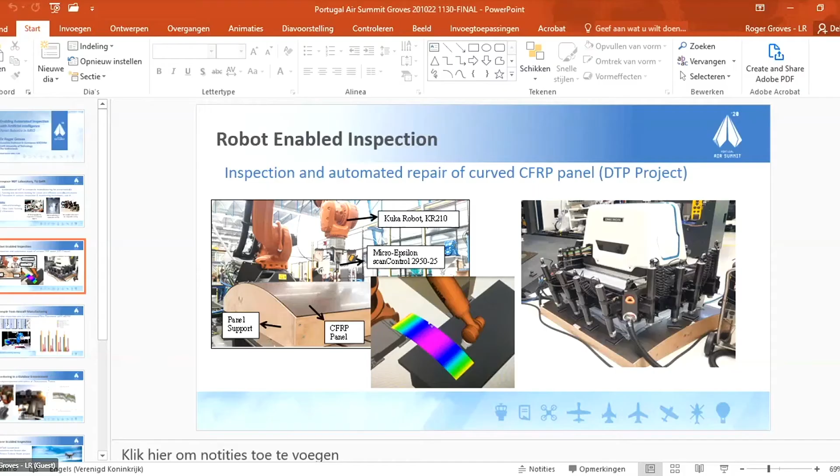Dr. Groves, are you listening to me? Yes. We don't see anything on the screen. Oh, we have two persons, strangers, but not exactly the things we were supposed to see. So you need to check what's going on. We'll wait, we have time. Don't worry, this isn't a flight issue. Yes, I'm back now, let me just try again. Yes please, I can share my screen. Can you see it now? Not yet. So it's beginning with the presentation. Take your time, yes, we still have half an hour. Good, yeah, good. Yeah, can you go back to the first slide please, so that we can make it coherent with your speech? Is that possible? Yes, okay yes. Thank you, sorry for interrupting you. Are the slides visible now? Yes, perfect, okay, thank you. And still now? Yes, you are not seeing, okay, but what is relevant is the presentation. Okay, thank you, perfect. So yeah, I gave my introduction.

I wanted to just quickly show you these three examples of research topic areas in my laboratory: 3D shearography, which is the left-hand picture; fibre Bragg grating monitoring of a composite hydrogen tank during testing in the middle picture; and an example of air-coupled ultrasound in the right-hand picture.

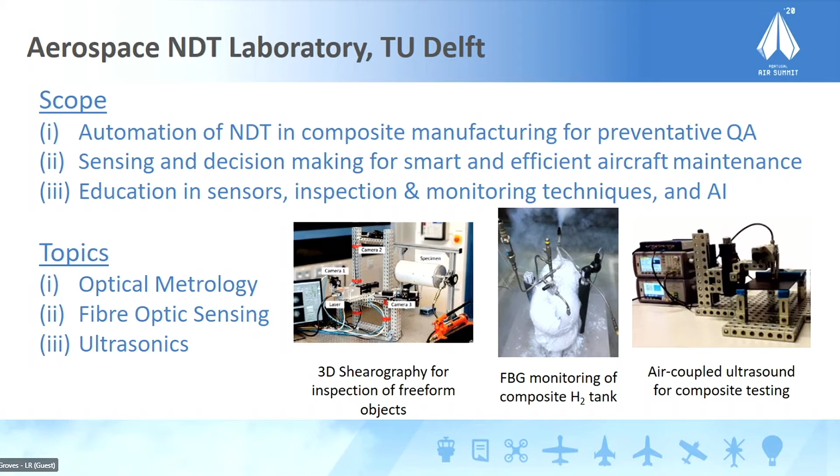Let me go on to where we're using robots for robot-enabled inspection. These are examples from the Defence Technology Project. We can see here in this picture the test panel. We're scanning the test panel with a laser line scan sensor. We're analyzing that data to determine the curvature, the extent of damage due to impact on the panel.

On the right-hand side, we have a 5-axis milling machine, a portable one, which has been placed on the panel and used to mill out the repair patch area. In this project we then added a repair patch, bonded into the structure, and then repeated the non-destructive inspection analysis to confirm the repair had been made satisfactorily. So this is a technique to speed up and automate the repair of composite aircraft.

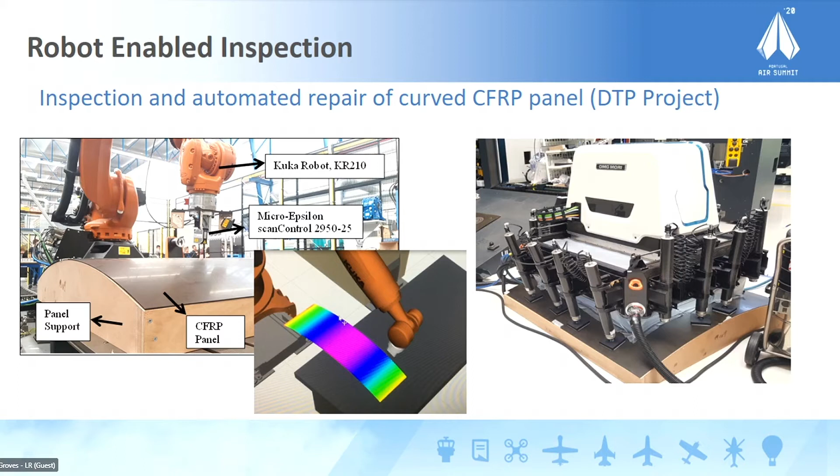The next slide takes a little direction away from maintenance and gives you one example from aircraft manufacturing. In the automated fibre placement process, there are a number of different defects that can be introduced. The picture top left shows examples: wrinkle, twist, gaps, overlap, and foreign material that can be found. Of course, we like to find them early in manufacturing so that they don't become a problem during in-service use. In this project, we also worked with a laser line scan sensor fitted to a robot, in collaboration with DLR in Germany.

As mentioned briefly earlier this morning, one of the very important things with using artificial intelligence to inspect parts in service is to look very carefully at the false positive rate and the false negative rate, and to work very hard on the reliability of the algorithms to give a correct diagnosis of the part being investigated.

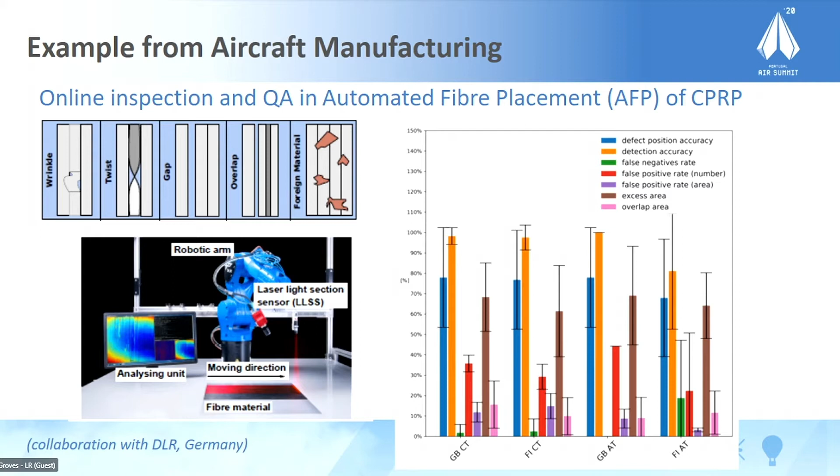Okay, I'd like to show one nice example here. This is inspection of tires during tire qualification tests performed with Airbus. We use the Teratyre inspection truck, where you can fit one aircraft tire in the center and apply a force to the ground with different rotation of the tire to check the wear.

The left-hand side shows an early picture from the project where I had the idea to place a bicycle wheel onto the robot we have in the laboratory at TU Delft. In the center lower picture, you can see the sensor we placed close to the tire. It's actually a hostile environment there, with pieces of rubber and smoke, a difficult environment.

In this test, we were able to see that the tire degradation was of the order of 10 millimeters, and we saw some variations in the tire degradation depending on the loading that was applied to the tire.

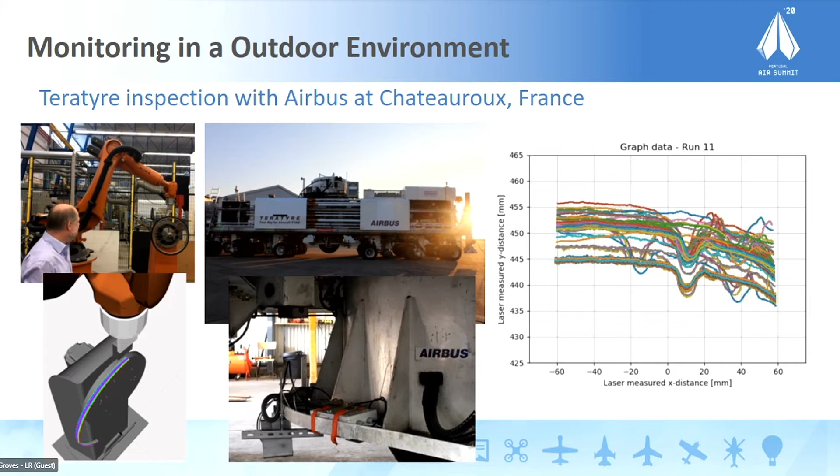Okay, now briefly introducing a new project we're starting in the Aerospace NDT laboratory. This is drone-enabled inspection. The project is called AirTub: automated inspection and repair of an offshore wind turbine blade. The wind park is Borssele 1 and 2, in the North Sea off the coast of the Netherlands.

In this project I don't have any results to show yet, but we're developing miniaturized inspection technology to be carried by the drone to perform automated NDT inspection offshore. And of course, what we learn in this project will not only help improve the sustainability of the energy supply, but will also find its way back to the aerospace environment for aircraft inspection.

My last technical slide is one of the competing techniques for robot inspection, also mentioned earlier this morning, which is structural health monitoring. In my work on structural health monitoring, one main aspect I look at is the design of these systems for real structures, and the positioning of sensors to cope with different types of damage: deterministic damage, which occurs where there's a high stress concentration in the material, and probabilistic damage, which occurs due to random impact damage.

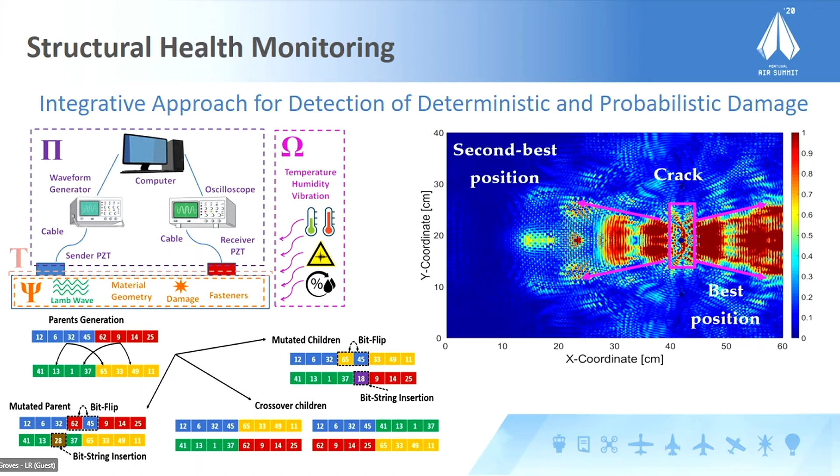The picture on the right shows the positioning for the best and second best structural health monitoring sensor locations. Okay, so with that, I'd like to thank you for your attention and pass it back to the chair of the session.

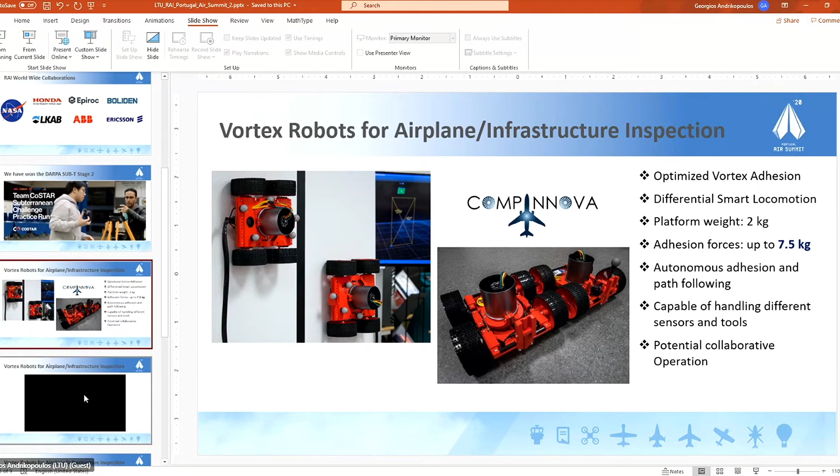Which is constructed by University of Patras. So today we're going to give you a short presentation of the activities we have been doing on the Vortex robot platforms, and a couple of videos to show you. I don't know whether you can see the videos, because I understand you don't see the presenter's view. Just a verification, can you see the video?

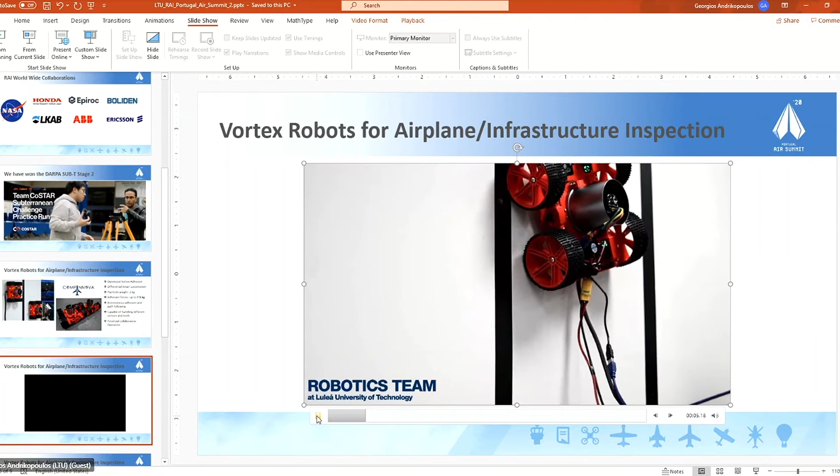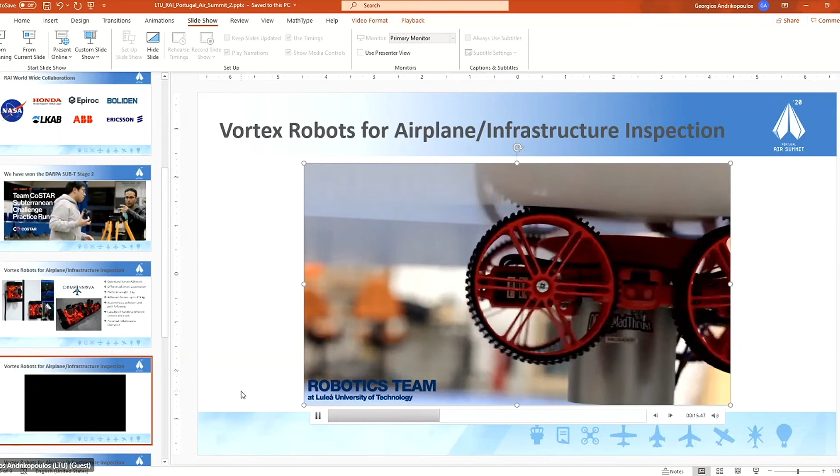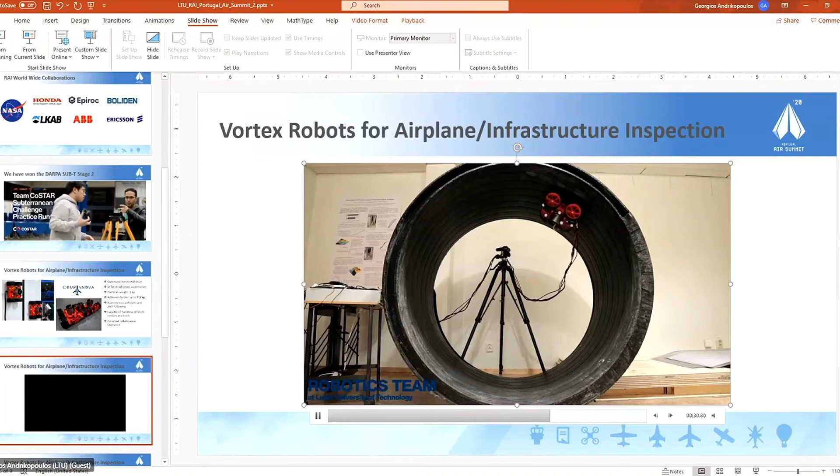So the climbing robot platform uses the principle that when we put an electric ducted fan close to a surface, there is a sweet spot, an optimized distance where we get the vortex phenomenon and the maximization of the adhesion force. We are using this principle to produce a platform that can hold a high payload, in this case 7.5 kilos, which gives us also the ability to mount sensors and different tools.

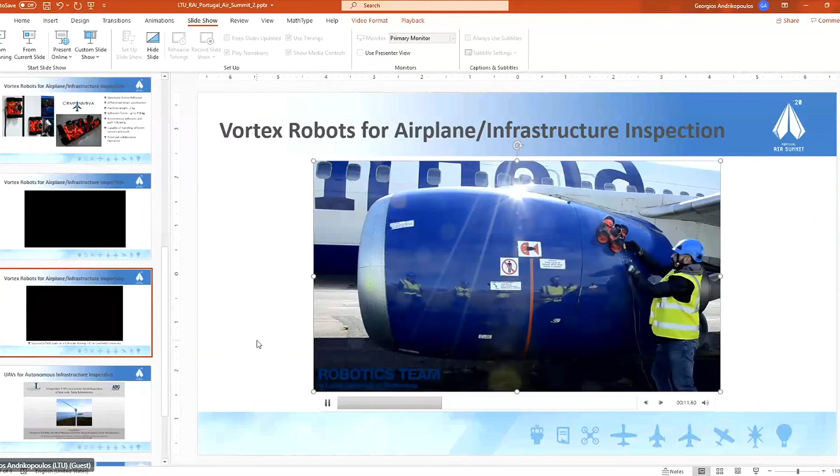We have been testing and evaluating the specific platform in different scenarios, not only onto aircrafts, as you see in the video, which was one of the successful trials at Cranfield University on a Boeing 737, where we tested the mechanical properties of the robot and its ability to traverse different surfaces of an aircraft, from a fuselage to wing, and also the challenging transitions between the wing and the fuselage. So from that part, we're talking about the structural challenges of using such systems, and of course, as you mentioned, the challenges of using automated systems in close collaboration with human operators.

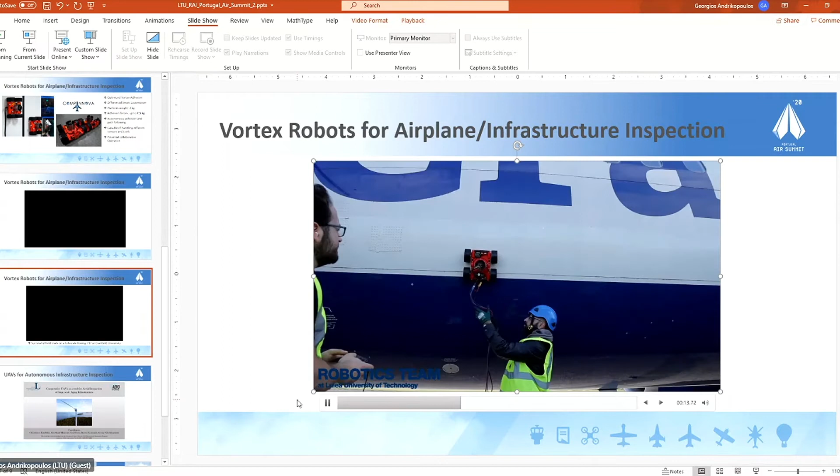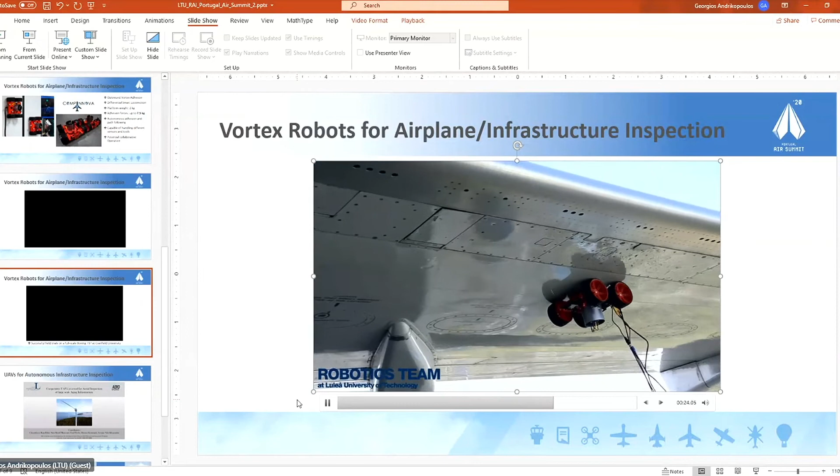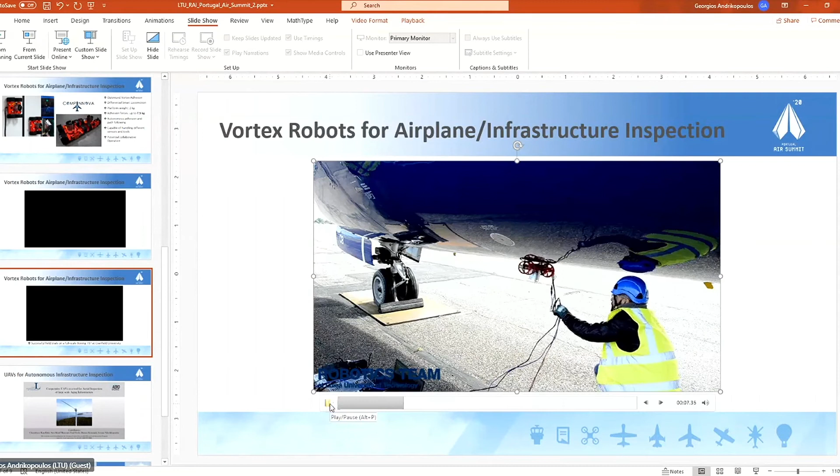Currently, in respect to CompInnova, we're performing the final integration tests with the sensors and the final tests on real composite panels, assessing the general efficiency of the solution in handling autonomously - and we highlight that, autonomously - the inspection, but also semi-autonomously the repair via a laser cutting process and a patch placement process performed by an automated system. We have also been developing different technologies, software integrations and autonomous behavior for wind turbines and mines, as I mentioned.

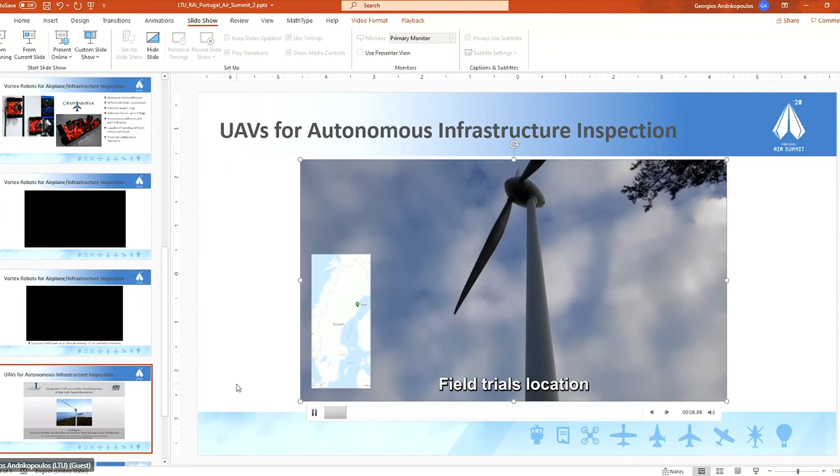This is a video of field trials that we did in north of Sweden in a wind park. In this case, we used drones and optical representation, optical cameras, in order to visually inspect the wind turbine. The visual inspection was done autonomously.

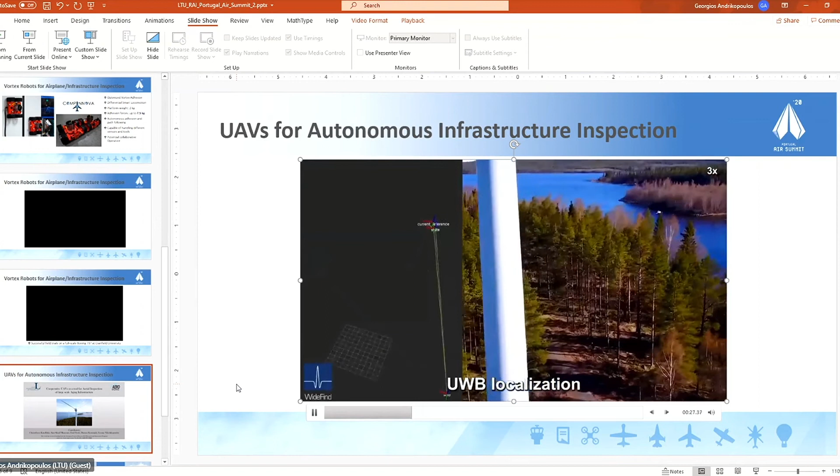We have performed collaborative path trajectory generation in order to use multiple drones for that particular purpose. And the end goal was to recreate a visual representation, a 3D reconstruction of the wind turbine in order to assess visually any damages on the surface.

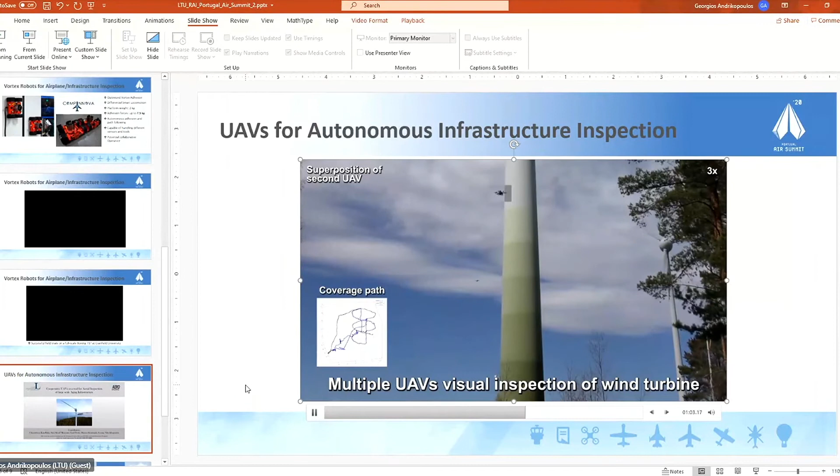Of course, there are a lot of challenges here, the absence of features, as we are talking about a quite uniform structure. This is something we are currently developing and testing, not only with the drones, but with our climbing robots.

So we are developing algorithms and software to account for autonomous inspection, for disturbances like high winds in this case, but also to account for human-robot collaboration, such as in the case of airplanes, where we want the robots to work collaboratively with themselves and with human operators.

So this would be a brief presentation of our efforts and activities funded by Horizon 2020 projects, and also our worldwide collaboration with the aforementioned companies. That would be the end of the presentation. Apologies, there was a mix-up with the multiple screens, so I guess you were seeing the PowerPoint this whole time, but I hope you got the first idea of our activities in the field.

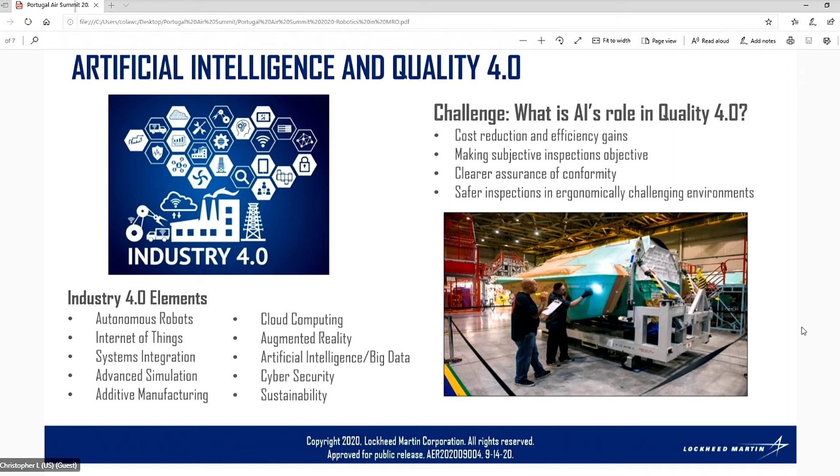Unfortunately, that is what historically we still see today. Historically, it's been the best method, but I think there's a better future possible with the newer techniques made possible by Industry 4.0. I think artificial intelligence is one of those critical roles, as we've been talking about the past 2 days at the Air Summit.

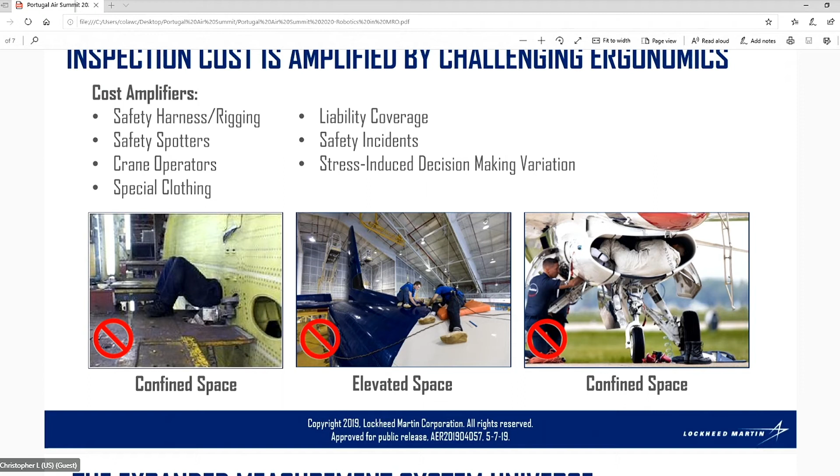So specifically for the MRO arena, the problem associated with doing human-based inspection has to do with, one, safety, and two, hidden cost.

Anytime we perform an inspection in a confined space, whether that be inside of a fuel tank, which of course has odors and has to be vented first, there's a large cost in terms of prepping that bay for a human to enter. You would have to think there's got to be a better way to do this, as well as for climbing on top of a large aircraft and doing an elevated space inspection.

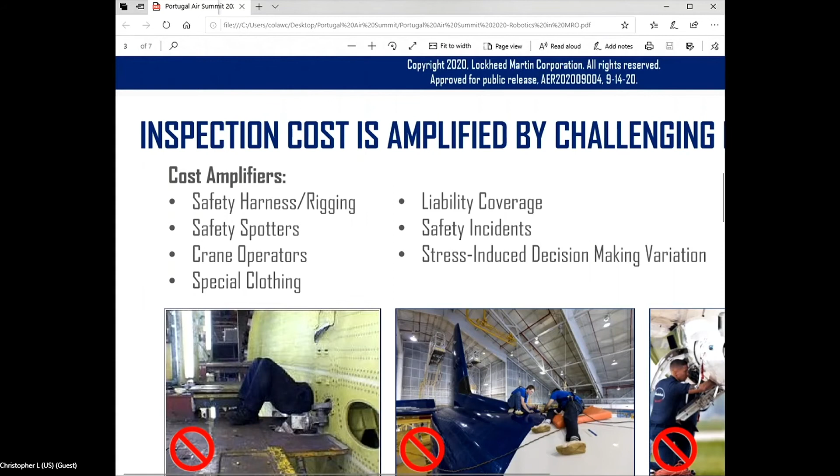It's interesting, in our research we've uncovered that the time it takes to do the inspection is one thing, but the total time involved with setting that inspection up with the safety spotters, the personal protective equipment, and procedure can actually raise the cost of these inspections by 4 to 6 times the man-hours associated with just doing the inspection if you were standing on your own two feet.

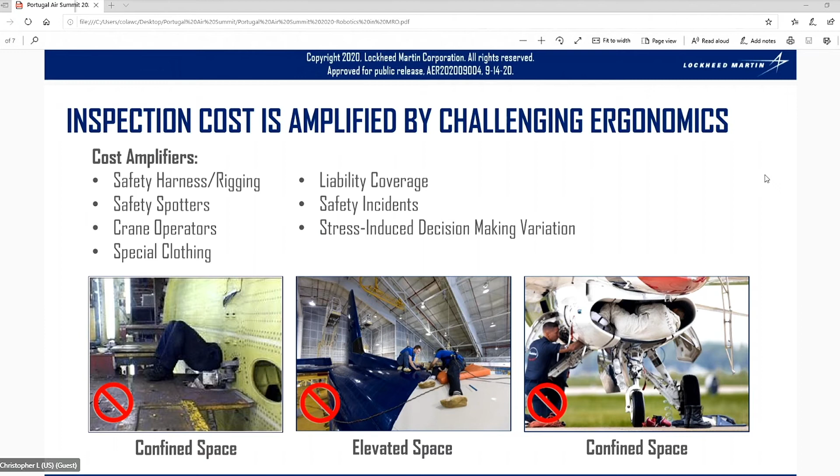So that makes a huge use case for investing in these technologies for the betterment of our process. Now, most of us who have classically been in this environment are very used to gauges, and to training our operators to minimize that measurement variation.

What we're going to see is that we need to be more focused on AI, and that of course induces some new areas of concern. One of them is, how do you validate and qualify those AIs? This introduces a data science body of knowledge that's a new emerging topic for everyone in the arena.

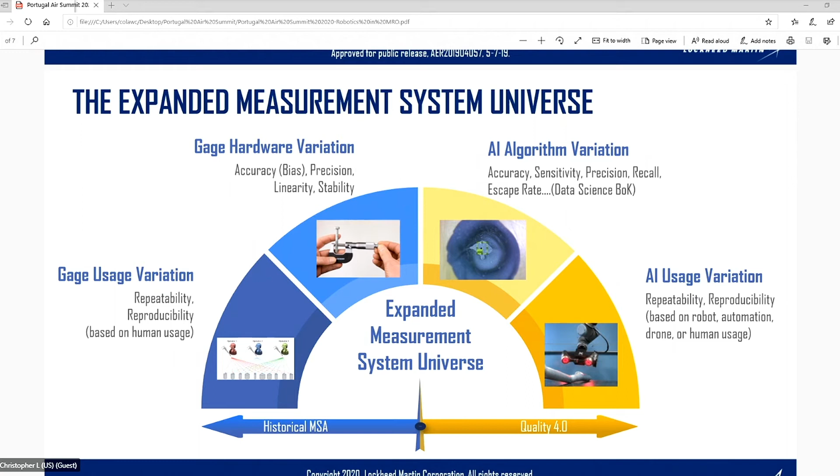Also, how do we qualify that the AI is performing the work correctly? Much like how you would qualify a gauge, there has to be a process in the future of qualifying the AI as well. Comfort on both sides of the spectrum, with the traditional gauges and with the new AI, is a real challenge for all of our human capital systems, and something we all need to be paying attention to.

As an example of what is possible when you incorporate artificial intelligence and robotics in an MRO environment, I'd like to offer an example made possible on one of our airship programs, for the process of doing pinhole inspection. On the bottom left, you can see what has historically been the classical process.

You would take a very bright light and shine it at the airship. You'd have to partially inflate the airship because someone would have to go inside and look to see if there was a beam of light coming through pinholes. So just doing that inspection already takes two people: one to hold the light and one to be on the inside. But of course, there are other people in the field of view, the safety spotters and other equipment handlers to make this possible. So already, this is a four-person job, and it could be done so differently nowadays.

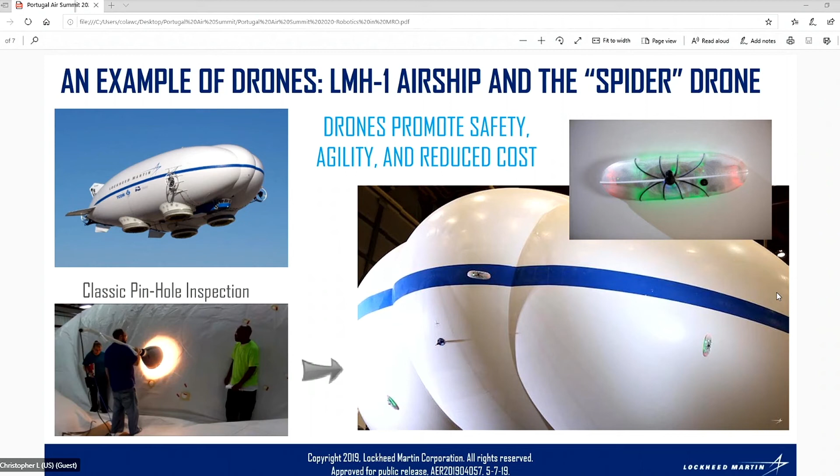If you were to have a drone that would adhere to the outside of the surface, that could perform in a swarmed activity with other drones, you could rapidly scan the envelope in a fully inflated view, which would reduce the time on the ground. And you can network this, of course, with the data into a digital twin and an inspection program, to provide assurance that the aircraft is airworthy and ready to fly again. That's the example that we're chasing with our pursuits.

So just to close, I want to share a couple of examples. Of course, we just saw the great Vortex drone. I showed you an example of an airship-based drone. But I think the focus can tend to resonate around the appeal and the novelty of the drones. Really, none of this is possible without this.

Over the past year, we've performed several experiments with laser scanners, cameras, and infrared sensors, and compared those to classical processes that involved tactile type of efforts, where perhaps you would tap or rub or touch, trying to sense voids or defects, scenarios where you would use a flashlight and dental mirror in confined spaces, or where you would hand apply a laser scanner, to get results. And what we found is that the modern approach was superior in these three studies.

Our highest capability approach for confined spaces, as an example, is to use a camera with artificial intelligence scanning and judging conformity on features inside the confined space, as opposed to reaching in with a flashlight and dental mirror. Our second best case was using a robot to apply a laser scanner, as opposed to having a human apply it. And our third best case out of the six was using an infrared scanner instead of touching and feeling along the surface for voids underneath the surface level that you can't physically see.